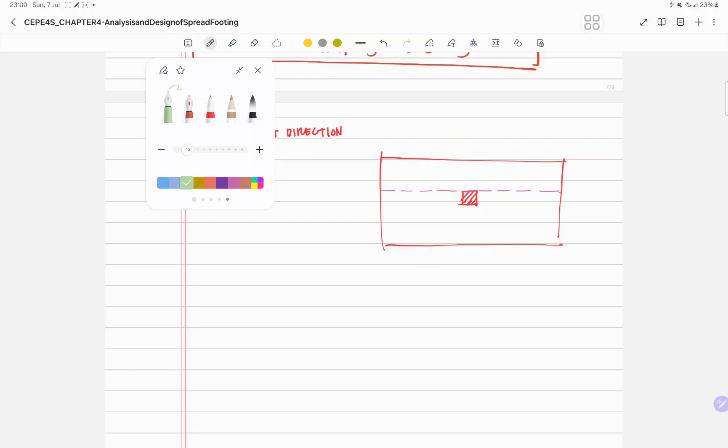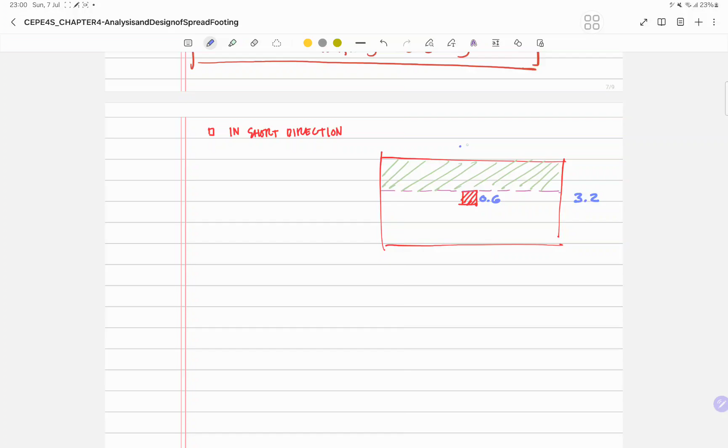Okay, so if this is 0.6, this is 3.2, and this is 4.8. So this one is equal to 3.2 minus 0.6 divided by 2, so this is equivalent to 1.3.

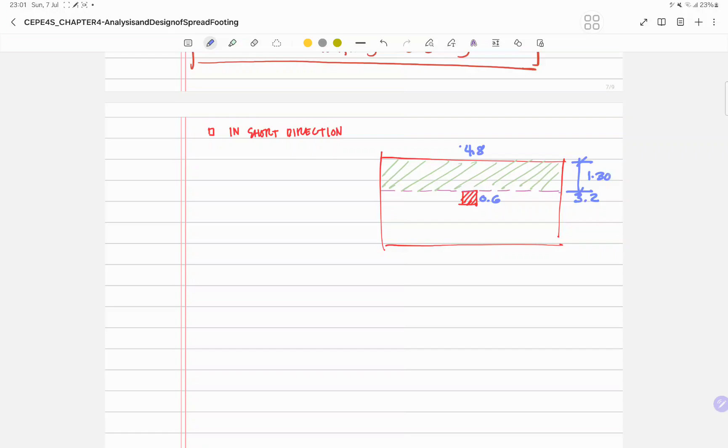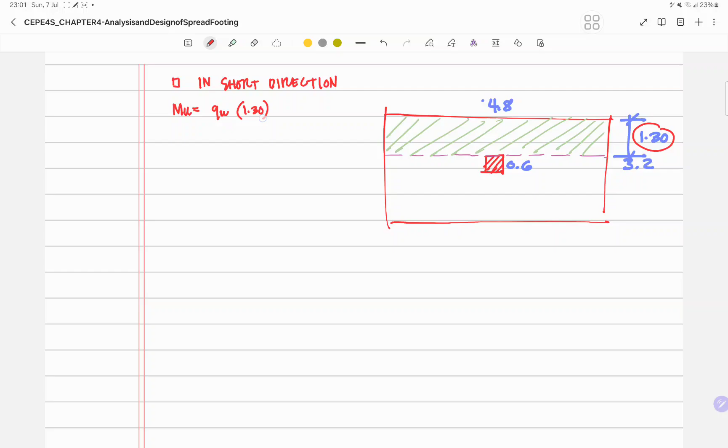So 1.3. So for MU is QU, the intensity, multiplied by 1.3, multiplied by 4.8, and then multiply by the moment arm.

So QU is 266.327 times 1.3 times 4.8 times 1.3 over 2. So MU is equal to 1080.22

Kilonewton meter. Then check again if the section is in tension controlled or transition.

So again, we need to compare phi MNT to MU. So phi MNT is 459 divided by 1600 beta 1 fc prime b d squared multiplied by 1 minus 3 over 16 beta 1.

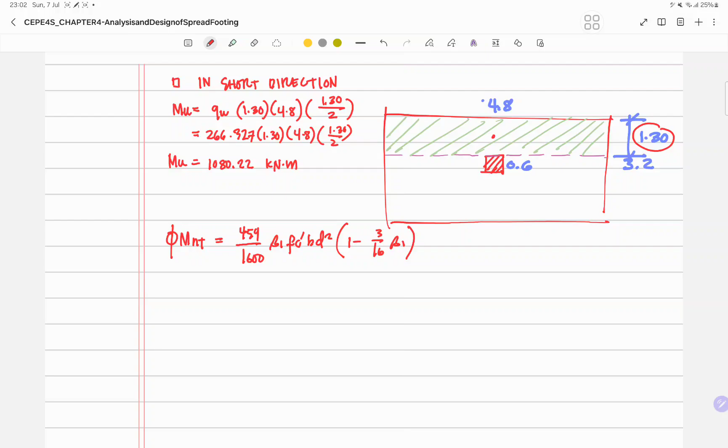So 459 divided by 1600, beta 1 is 0.85, then 28 multiplied by 4,800 multiplied by our D. So our D in the short direction is equal to 637.5 squared, then multiply by 1 minus 3 over 16 multiplied by 0.85.

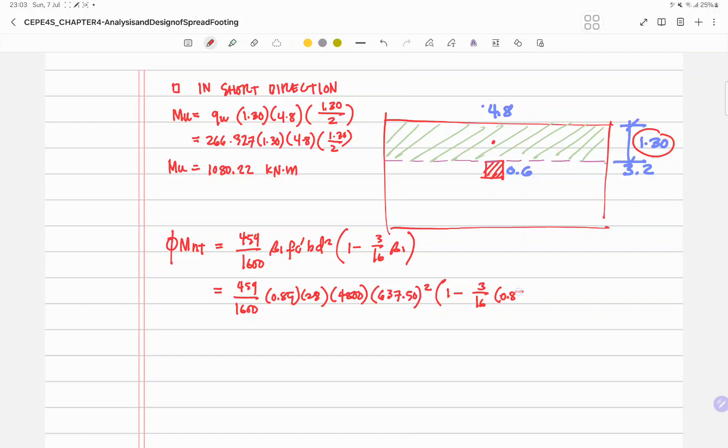Okay, so our phi MNT is equal to 11,196, times 10 raised to, in kilonewton meter. Okay, so this is greater than the MU. So again, this one is under tension control.

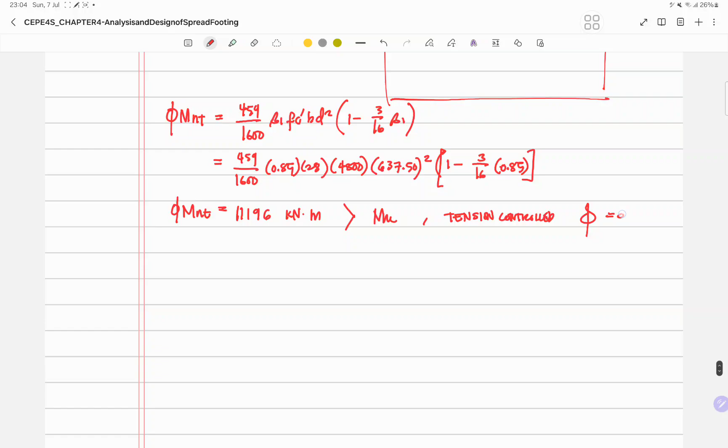Phi here is 0.9. So get the value of Rn from MU is equal to phi Rn b d squared. So MU is 1080.22, so times 10 raised to 6 to convert it to Newton millimeter, times 10 raised to 6.

So it's equal to 0.9, and Rn, our B is 4,800, and our D is 637.5 squared. So Rn is equal to 0.615. Then solve for rho.

So rho is equal to 0.85 fc prime. Fc prime is 28, and then over Fy 345, multiply by 1 minus square root of 1 minus 2, and then multiply by Rn divided by 0.85 Fc prime.

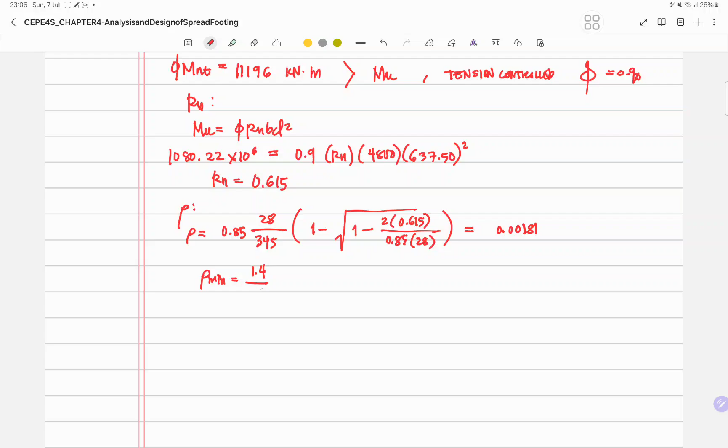So the answer for rho is 0.00181. Then get the rho minimum, then check if rho is less than rho minimum. So 1.4 over Fy 345.

So same with the long direction, this is equivalent to 0.00406. So compare this to, so rho minimum governs.

So use rho is equal to 0.00406. And then again AS equals rho BD. So 0.00406 multiply by 4,800 multiply by 637.5.

So it is equal to 12,423.6 millimeter squared. So in rectangular footing, reinforcement in short direction shall be distributed in accordance with the section 413.3.3b.

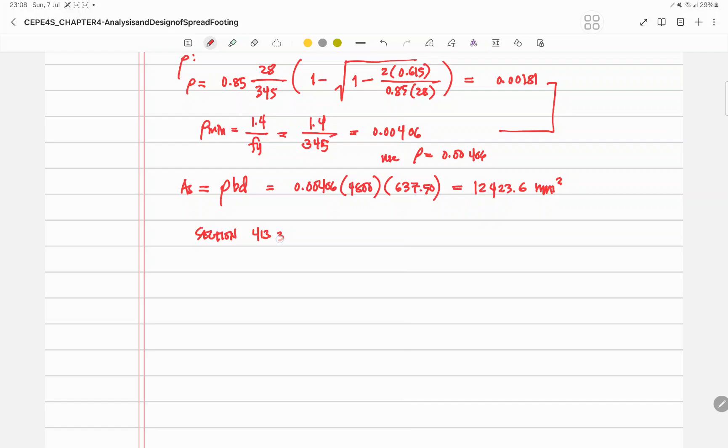So we need to get the gamma S, then gamma S multiply it by AS, and then afterwards get the number of rebar for center bandwidth and for each outer bandwidth.

So for the computation of gamma S, it is equal to 2 over beta plus 1. So beta is simply long direction or long side of footing, or L divided by short side, divided by B. So simply 4.8 divided by 3.2.

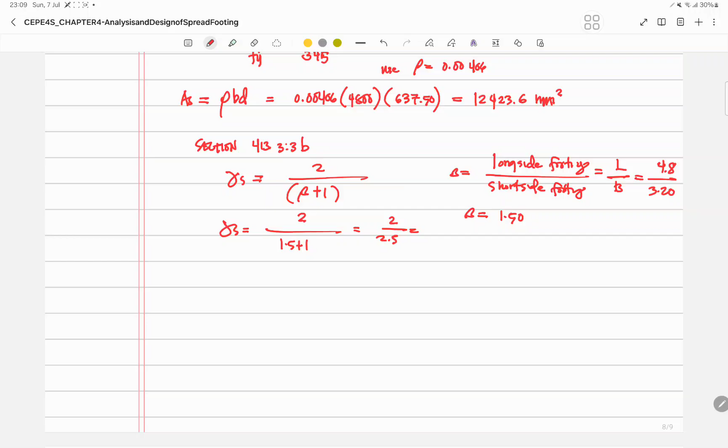Okay, so gamma S is equal to 2 over beta, beta is equal to 1.5. So 1.5 plus 1 is 2.5. So gamma S is equal to 0.8.

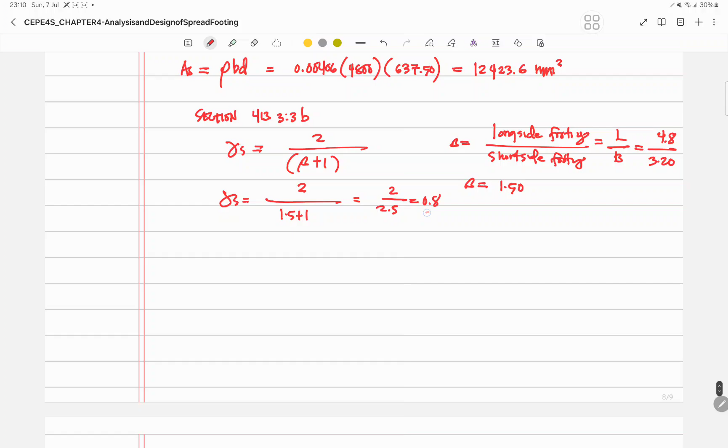So meaning 80% of the AS is laid out at the center bandwidth. So 0.8. So AS at center band is equal to 0.8 of AS.

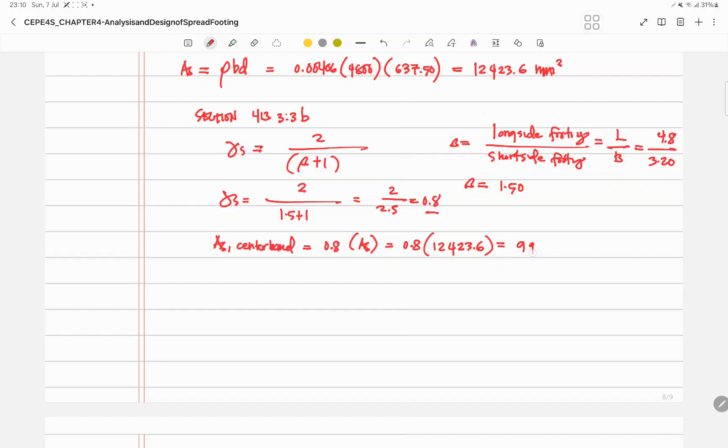0.8 of 12,423.6, equals 9,938.88.

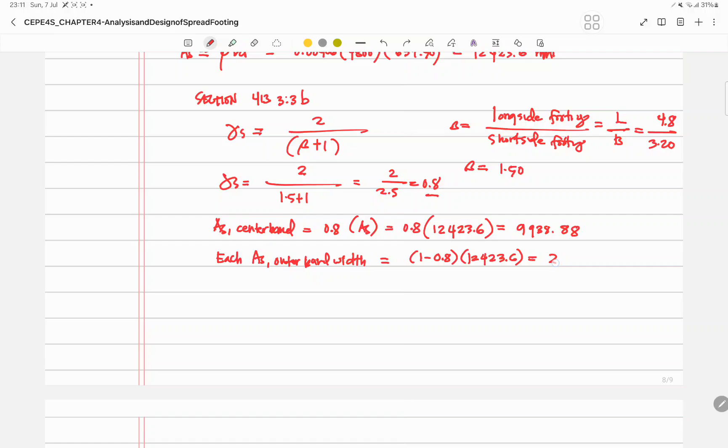And then for outer band, so each AS at outer bandwidth, okay, so 1 minus 0.8 multiplied by 12,423.6, or simply AS minus this value. So 12,423.6 times 0.2, equals 2,484.72. So this one is in millimeter squared.

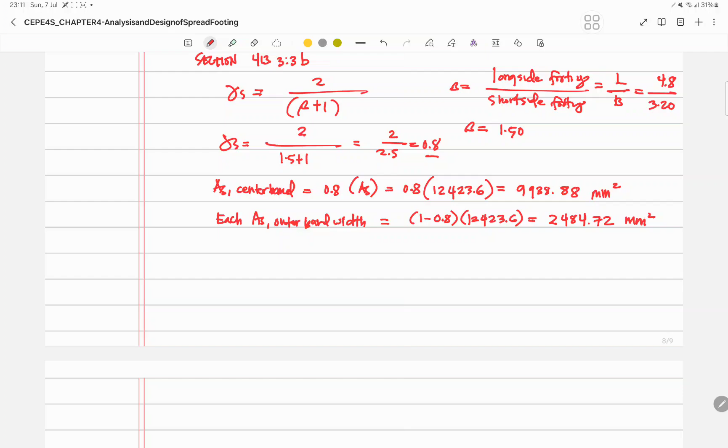So gamma S is unitless. So for center bandwidth, okay, our N is equal to 9,938.88 divided by the required diameter or area of rebar.

So this one is equal to 20.24. So let's say 21 pieces. Okay, so check for the maximum spacing of the rebar. So S provided.

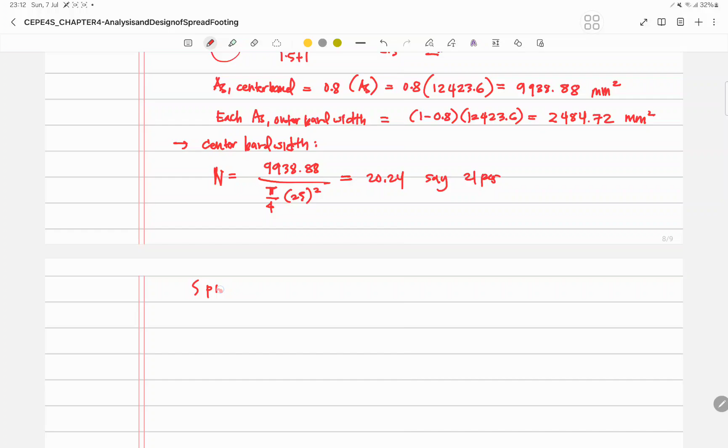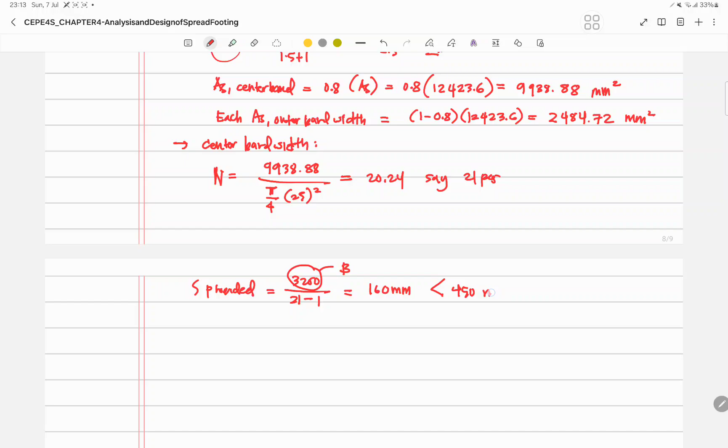Okay, so S provided is equal to 3,200 divided by N minus 1, so 21 minus 1. So this one is the center band. So same with our B width. Okay, so 3,200 divided by 21 minus 1, so it is equal to 160 millimeter. So compare it with our S max. So S max, governing S max, is 450 millimeter. So okay.

Then therefore, use 21 pieces, 25 mm diameter main bar, space uniformly on center at center band.

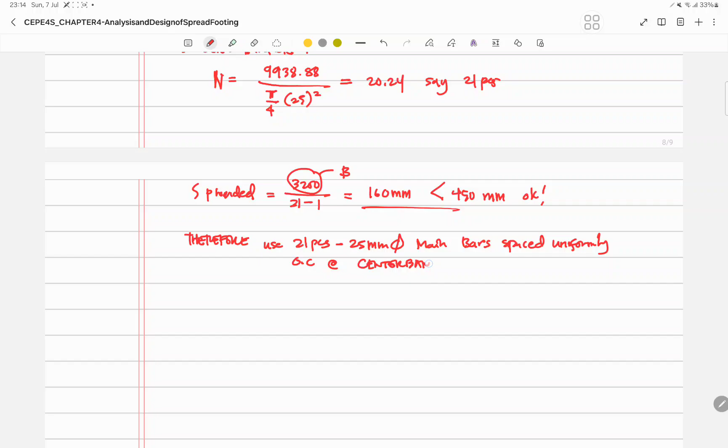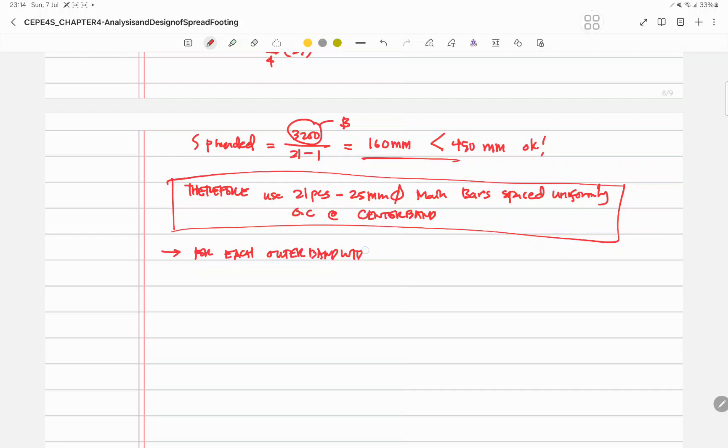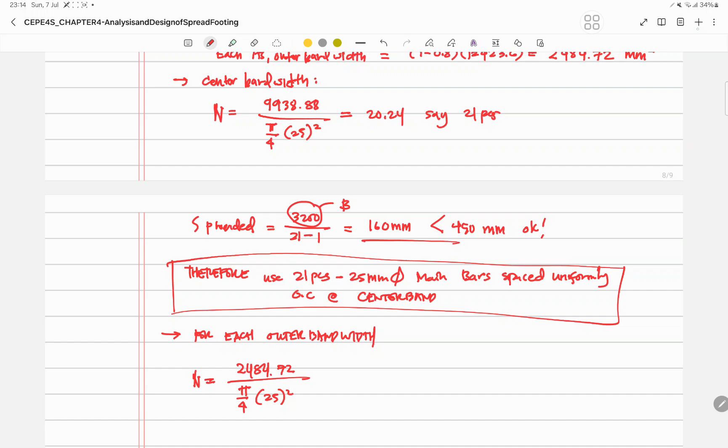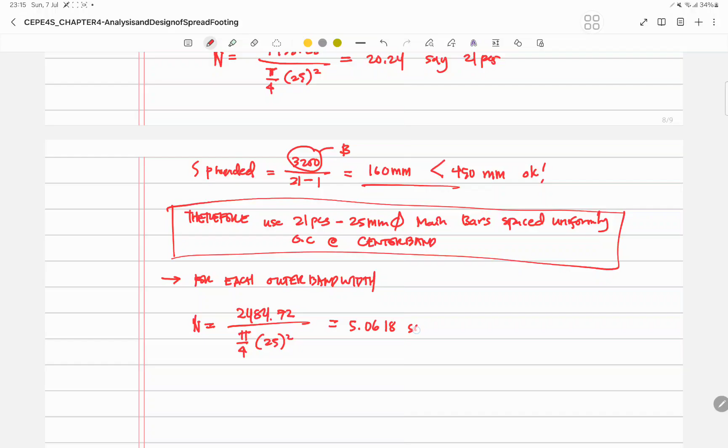And then for each outer band, so our N here is area of steel outer bandwidth, 2,484.72 divided by pi over 4, 25 squared. So this time our N is equal to 5.0618, so say 6. So for each outer band, we need to divide the number of rebar by two.

Okay, so if this is the footing, so this is the center bandwidth. So provided here 21 pieces, then here 3 pieces, then 3 pieces for each outer bandwidth.

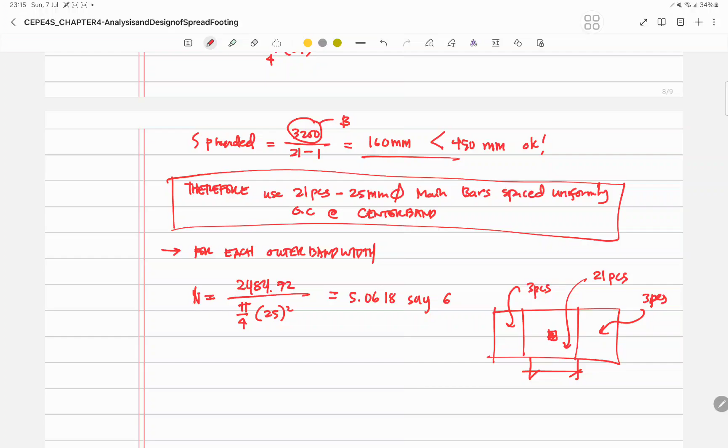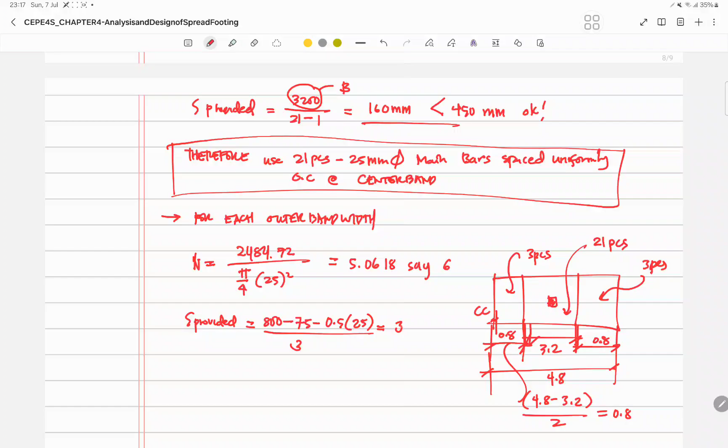Okay, so check the maximum spacing for bars. So again, S provided is equal to, so the length of this one is, if this is 3.2 and then 3.2, this one is 4.8, so this one is 4.8 minus 3.2, divided by 2, so 0.8 each outer band. Okay, so 800 millimeters, then 1 cc or clear cover, 75 minus half of the diameter of rebar, divided by 3, then it is equal to 356.25. So S max again is 450 governing, so it is less than S max.

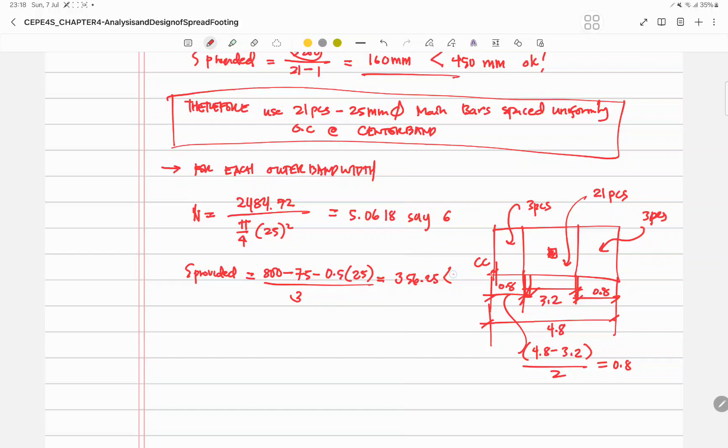Okay, so again, the spacing is okay. So therefore, use 3 pieces, 25 mm main bar, space uniformly on center at each outer band width.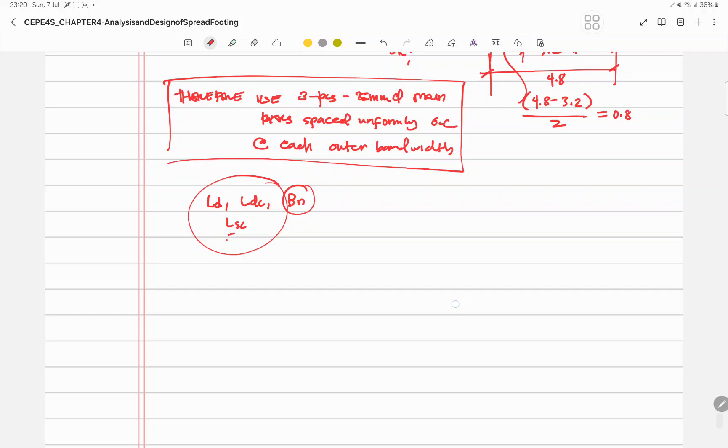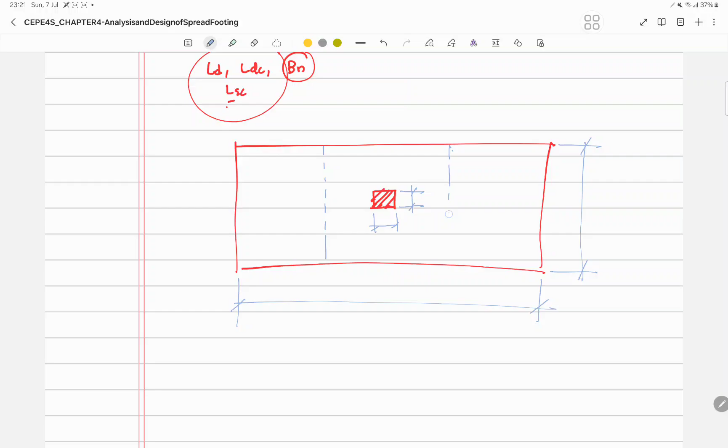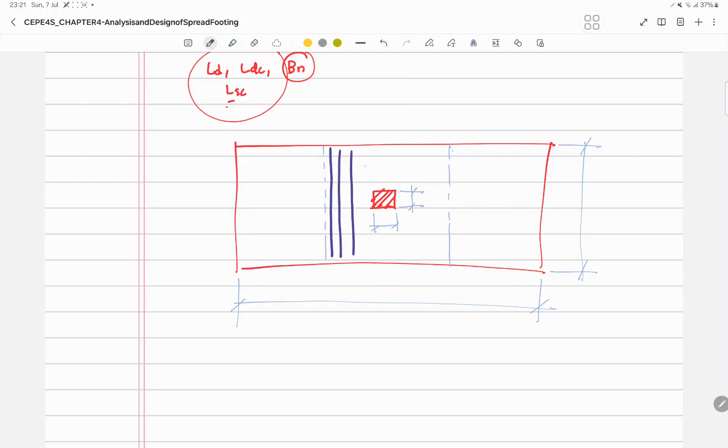Okay, so I will now draw the detail of the footing. So let's say this one is the column, and then this one is the width, the length. Okay, then the center band width here, then the number of the number of bar. Okay, so the detail here, example lang ito, so hindi scaled or parehas ng number doon sa detail natin.

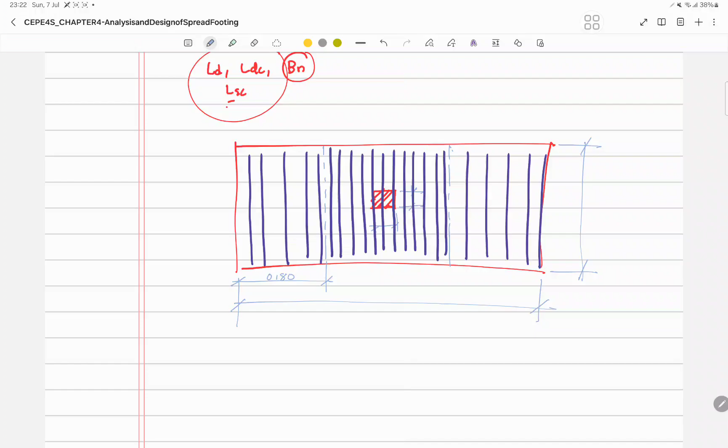Okay, so yan. So center band width, or the outer band is 0.8, and then this one is also 0.8, and the center band is 3.2, also 3.2, then 4.8 meters.

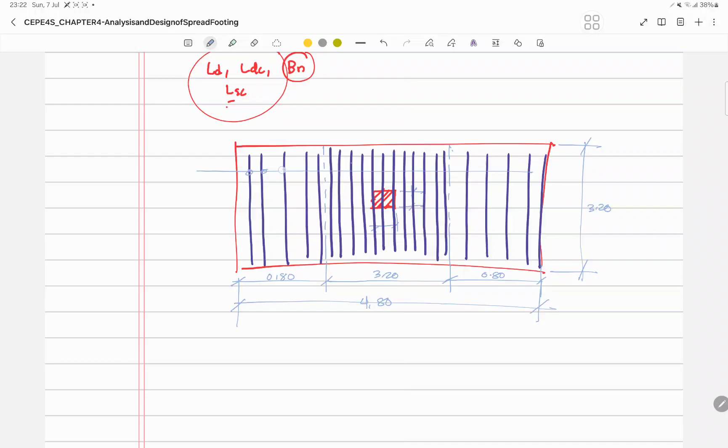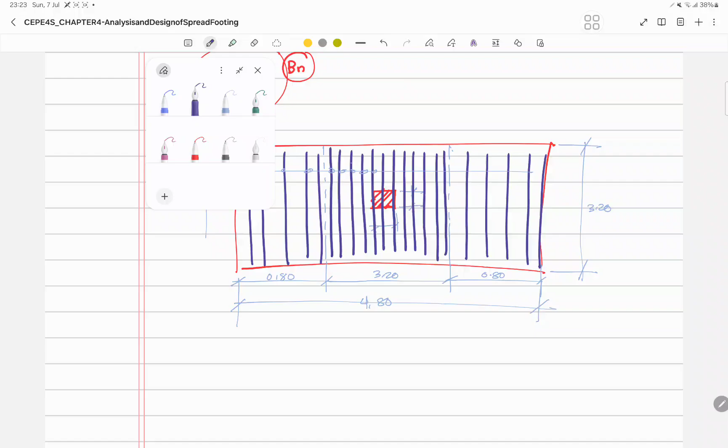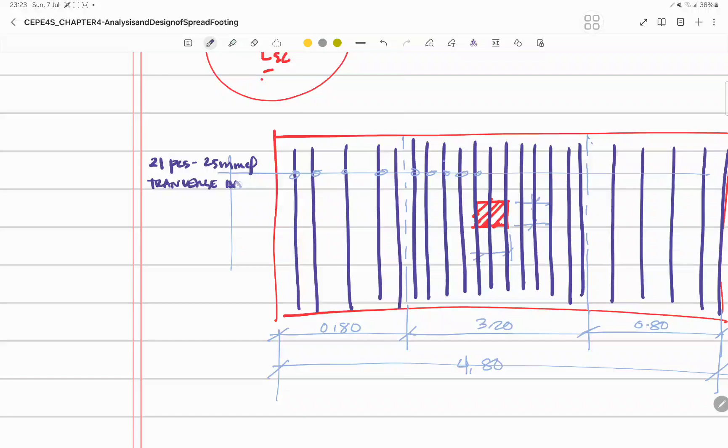Okay, so this portion, let's say, okay, so you can note here that you have 21 pieces of 25 mm diameter transverse bar, spaced uniformly on center at center bandwidth, and 3 pieces of 25 mm diameter transverse bars, spaced uniformly on center, at each outer band width.

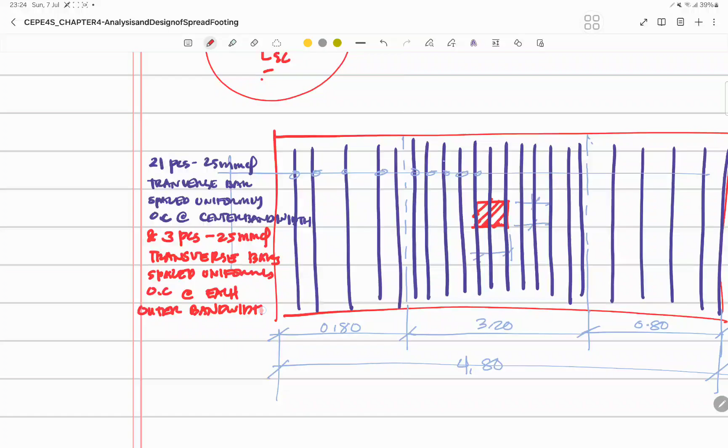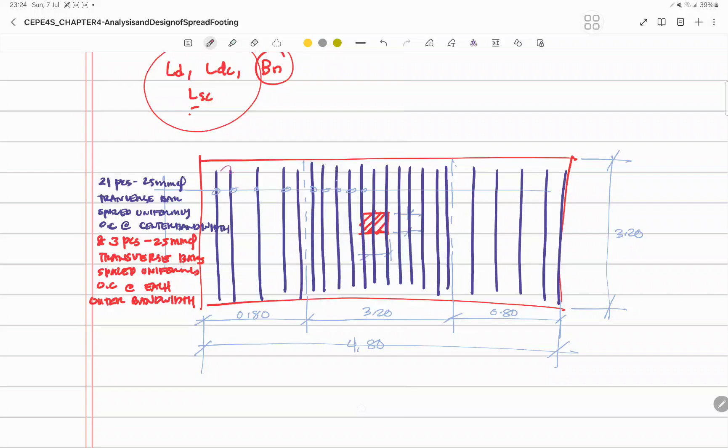Okay, so for our longitudinal, or along short or long direction, so ito siya. So yung na-compute natin dyan is equal to, let's say, yan, yun na lang. So yung bilang, hindi naman exact, hindi ko na in-exacto. Okay, so for short longitudinal bars, 21 pieces, 25 mm diameter.

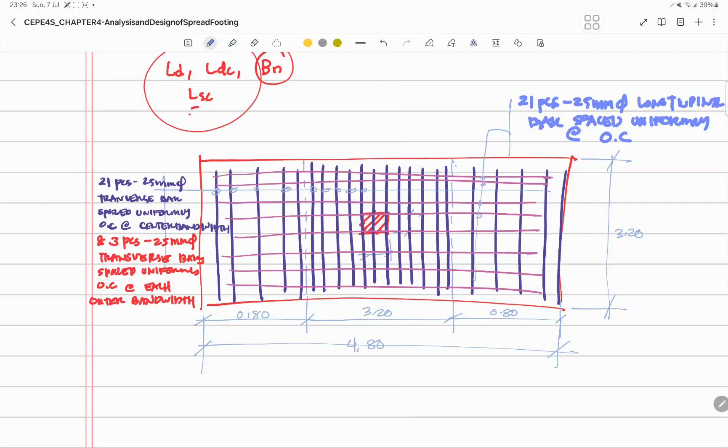Longitudinal bar, space uniformly at center, on center. Okay, so yun yung tsura niya. Then yung splicing, yan, kayo na lang ang mag-compute.

And then elevation, so the thickness of this is 750, okay, 75, 75. Then this one is 0.8. Then the width is, let's say the width is 3.2. Yan, you can use that. Sorry, align na lang natin. So ito na lang yung 4.8. Then we have here the center bandwidth.

Yan, lagay niyo na lang yung number of transverse bar, 21 yan. And 21 pieces, 25 mm. And then tatlo, yan, so 3 pieces of 25 mm. And then papunta doon, okay, so yan, so 21 pieces din. Okay, so that will be our detail for our rectangular footing. So thank you.